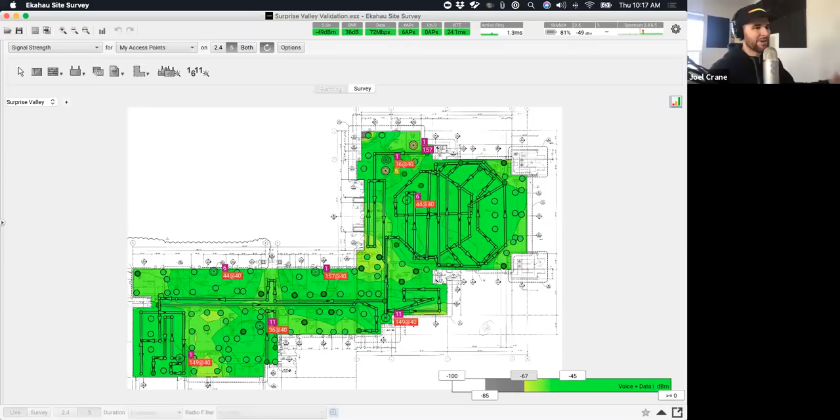So now we are looking at Ekahau Site Survey, and we've got the Ekahau Sidekick connected right now. I'll turn the camera on real quick and show you the Sidekick. I know I'm probably a little bit biased here, but this is one of my all-time favorite wireless tools ever. I love the Sidekick, it's so cool.

Okay, so this is the Ekahau Sidekick. It's basically a wearable, and as you can see, it's a little bit smaller than an enterprise-grade access point, and it's got an included shoulder strap, so you can throw it over your shoulder, kind of like a messenger bag. It's got some pretty great hardware on board, including two enterprise-grade 802.11 AC radios, and the primary function of those is basically for Wi-Fi scanning.

We'll get into the specifics a little bit later on, but they're mostly used for Wi-Fi scanning, which we end up using for site survey data as well. But the other thing it's got is a super duper powerful spectrum analyzer on board - literally the most powerful spectrum analyzer in the Wi-Fi industry. I know vendors tend to make a lot of audacious claims, saying their solution is the fastest and best. I'm not kidding around, it's the undisputed king.

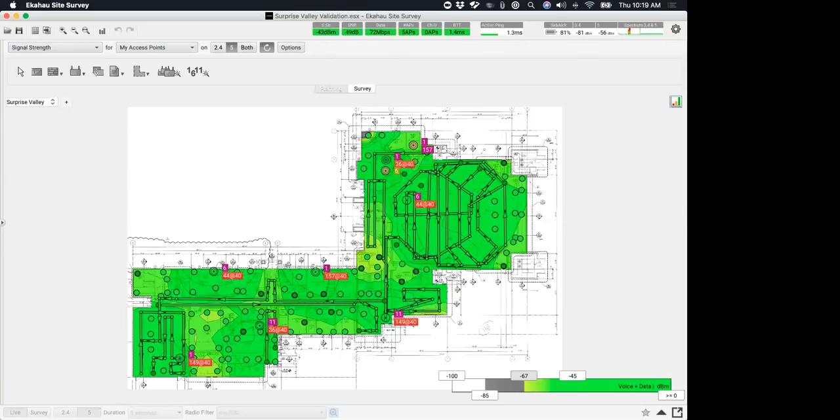That's coming from the spectrum analysis side of me that loves spectrum analysis and really enjoys this stuff. So that's the Sidekick - I've got that one connected right now. Let's go ahead and pop open the Wi-Fi scanning view that is in Ekahau. Down here at the bottom there's this little pop-up button, a little up arrow - that's where we can view the Wi-Fi scanner and the spectrum analyzer included in Ekahau.

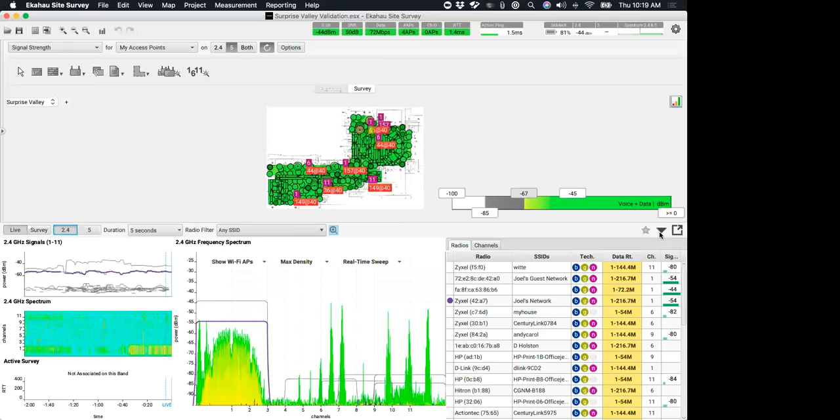So here we go, this is all live data in my environment right now coming from the Sidekick and my little access point and things like that. There's a couple things I want to point out here. I'm going to pop this out into its own view so we can get a closer look at what's going on here.

Terry says his Sidekick is coming today - that is awesome, I'm really stoked for you, Terry. I was really excited when I got my Sidekick as well, and I work for Ekahau. It was like, yes, got my Sidekick. So I understand your excitement.

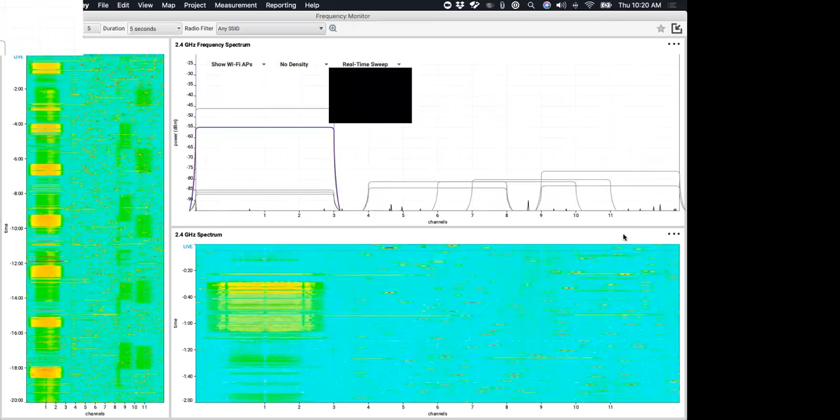I totally get it. So let's take a look at what this looks like live in our environment right now. I'm going to start by hiding the spectrum analysis data just to get it out of the way, and we'll come back to that in a little bit. I just want to concentrate on the Wi-Fi scanning data first. So a couple things we can see here.

First off, Joel's network right here - our signal strength is sitting at about negative 53 dBm. You can see that up there, and we can see that down here in the list as well. Then there's another network here on the same channel. You know what I think that one is? I think that's actually my Chromecast.

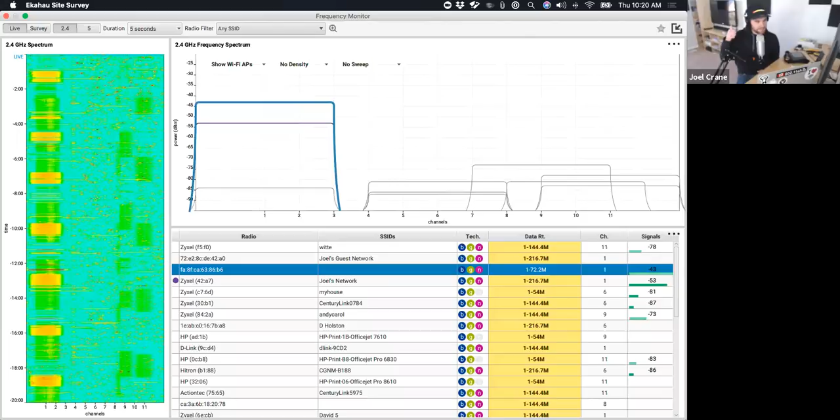If we turn the video back on real quick, you can probably see the TV right there where my thumb is. I've got a Google Chromecast plugged in there, and it's broadcasting its own SSID as part of how the Chromecast system works - it broadcasts its own SSID even while it's associated to my wireless network. So we can see there's the Chromecast, Joel's network, and Joel's guest network right there. Those are the 3 that are on channel 1.

Way down here in low signal strength we've got a few outliers. In fact, that one just disappeared - the signal strength is so low. Oh, and it's back now. That one is on channel 3. If we were to sort to channel 3, yep - CenturyLink 6790, sounds like probably one of my neighbors has just their little customer premise equipment hanging out here on channel 3.

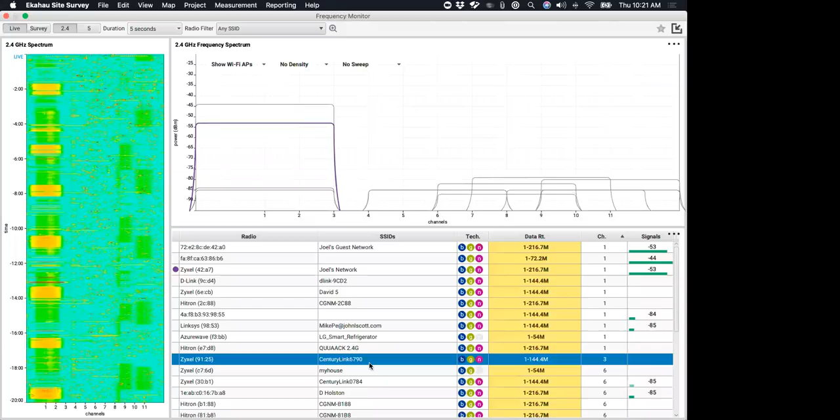So let's go ahead and turn on the spectrum analysis data now, and I'm going to turn on the waterfall view here so we can get that view as well. Let's talk about what we are seeing here in the spectrum - what's all this stuff going on right now? Things are going to come and go, and I'm going to use what I have here as an example.

The first thing I see is all these little spikes everywhere. Notice all these tall green spikes that keep randomly popping up all over the place. Down in the waterfall view, those spikes are also these little red dots that show what is happening over time. All of those little spikes, each one of those is a Bluetooth hop from my Bluetooth mouse and keyboard.

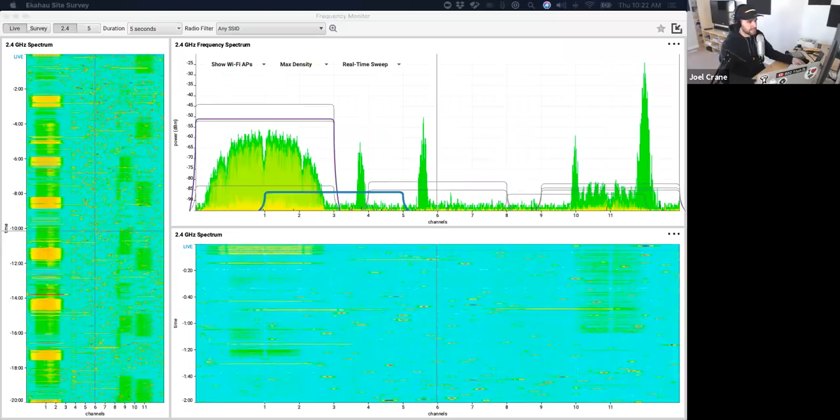If you look on my desk here, I've got an Apple Magic Mouse and a wireless keyboard - these are Bluetooth devices. I've also got an old Pebble smartwatch on, you can't see it because of my hoodie, which is the official Ekahau hoodie by the way. Those little spikes in the spectrum are all hops from my Bluetooth mouse and keyboard. The other thing we're seeing right here on channel 1 is this curve shape in the spectrum - notice it's perfectly lined up with the center of my wireless network channel. That curve shape is an 802.11b transmission.

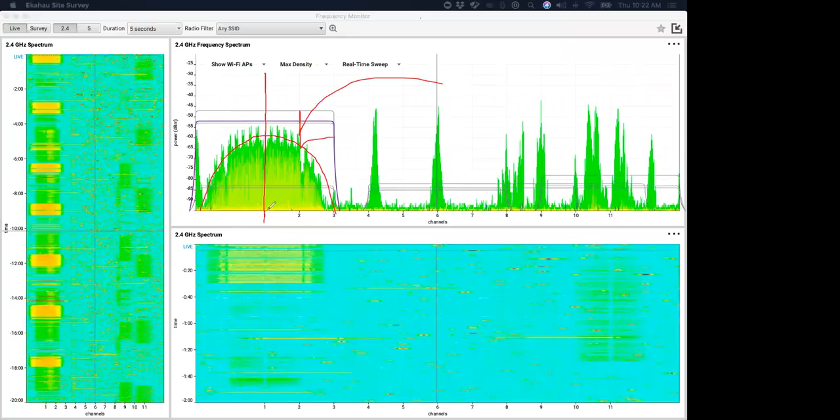And so there's something talking on that channel using an 802.11b data rate. And so that's just one of the things that we can see there. If we switch our view over to the channels view, we can see that our spectrum utilization right now is basically 0. Let's look at a longer time span, maybe 60 seconds worth of data. Looks like over the past 60 seconds, the average utilization on channel 1 is about 3%.

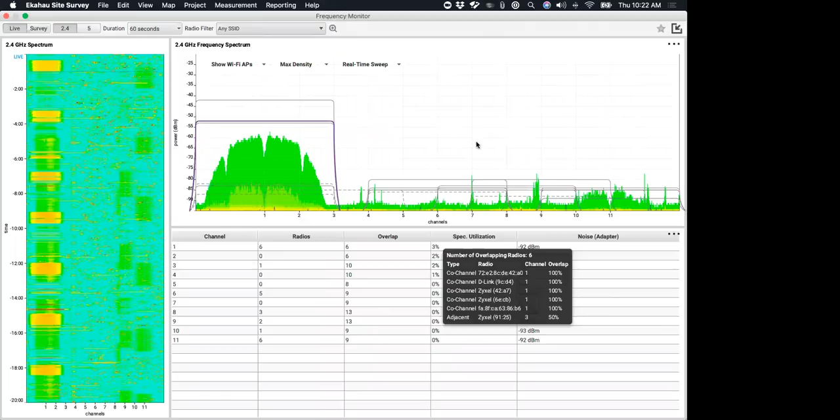Now let's skip up to the 5 gigahertz band and see what we can see up there. So I'll switch up to the 5 gigahertz band mode real quick here. It'll just take a second for Ekahau to make the switch. There's quite a bit of data coming in here. Okay, so here we go. We've got,

let's bring back our waterfall real quick here. And let's take a look at what's going on in our environment right now. What is actually happening here in the 5 gigahertz band? Well, if we zoom in on this channel, we can see that I'm actually running an 80 megahertz wide channel here, and we can see all of the activity on those channels right now.

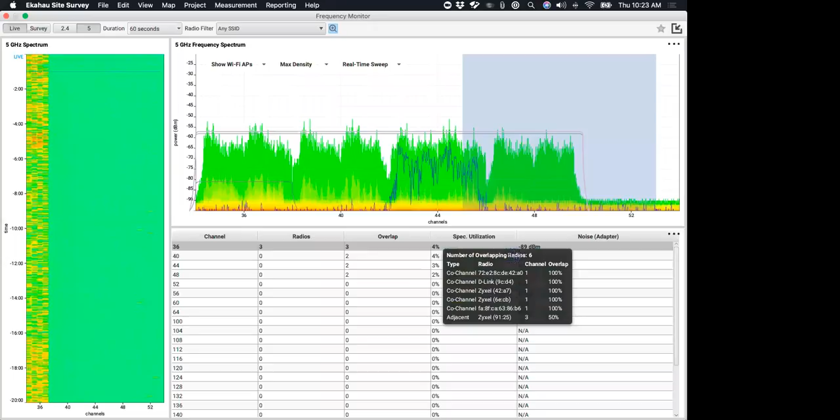So if we go back to the channels view, we can look and see, oh no, demo fail. Getting beach balls again. It's probably because I'm running a virtual machine and a bunch of stuff in the background right now, but we're looking at about 3 to 4% utilization right now. So that's just kind of a cool look at how busy is that channel, what's going on those channels right now. And that's all Wi-Fi right there.

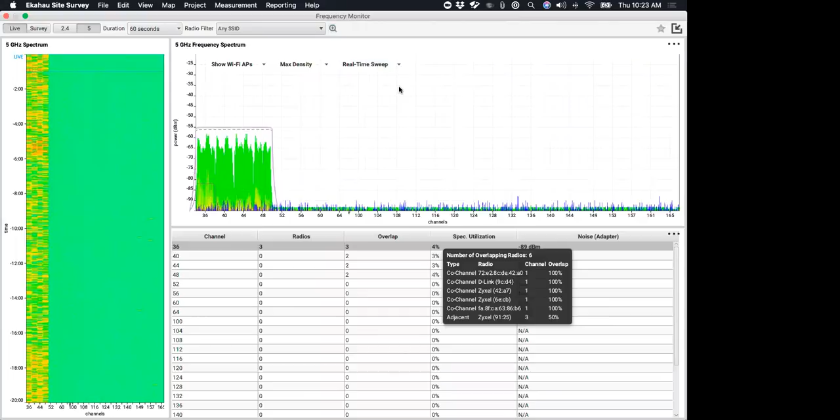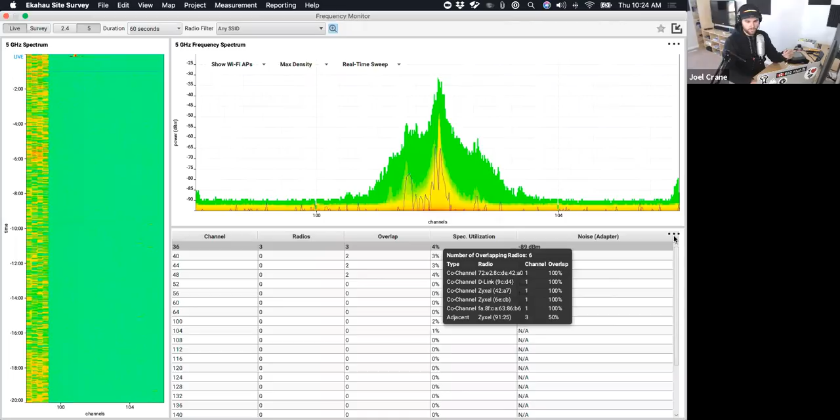But what about stuff that's non-Wi-Fi? What can we do for non-Wi-Fi stuff here? Well, I have a little toy here. This is something that my pal Jerry Olla here at Ekahau got for me. This is a little wireless video camera, and I want you to watch what happens when I plug this bad boy in. This thing is a lot of fun. So if we plug it in, we can see this shape pops up right here between channels 100 and 104. That is this little wireless video camera.

And if we turn our time span back down to about 5 seconds, we can see that the color indicates how often something is talking. If you see green, that means it's a really short signal. If you see red or black, that means it's a constant signal, kind of like an air horn. And so luckily there's nothing on channels 100 or 104 up here.

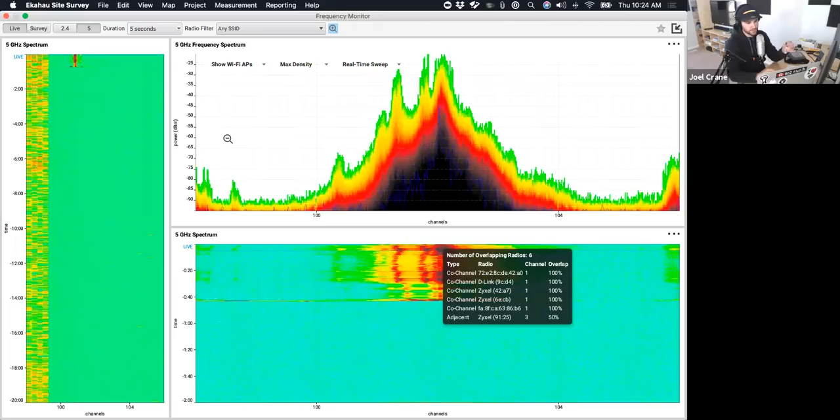I made sure that I didn't want to be on the same channel as this while I'm presenting to you over Wi-Fi. That'd be a terrible idea. Yeah, I've totally jammed myself while giving a webinar before. Bad idea. But anything on channels 100 and 104 is going to have a bad time right now because of this device that is transmitting on those channels. So that's what I wanted to show you on the spectrum analysis front.

So with that, let's switch gears here and move on to talking about the next tool that I have in my toolkit. So starting with a Wi-Fi scanner and a spectrum analyzer, coming from the Sidekick. Lots of options out there, but the Sidekick is by far my favorite one. I love this device. The spectrum analyzer on it is just awesome. The next thing I want to talk about, though, is packet capture. You could say either packet capture or packet analysis, packet capture being the process of actually collecting the data.

So how do you get a packet capture? Well, you're going to capture all Wi-Fi traffic from a specific channel. So what we could do is take a standard Wi-Fi adapter. I don't think I have anything in reach here, but we could take a standard Wi-Fi adapter, tune it to a specific channel, and just grab all the packets that we hear on that channel. An excellent packet capture device is actually a MacBook. It's one of the reasons why I use Mac OS.

Don't worry, I have an Android phone. I'm not a total Apple fanboy. I do think that there's some great products on both sides. I love all that stuff.

But MacBook makes an excellent packet capture tool. And to do that, if you look on my screen here, I have to turn off annotations first. Okay, there we go. There's an excellent tool out there called AirTool. This is by our good friend, Adrian Granados. And if you just Google AirTool, you can go find this tool.

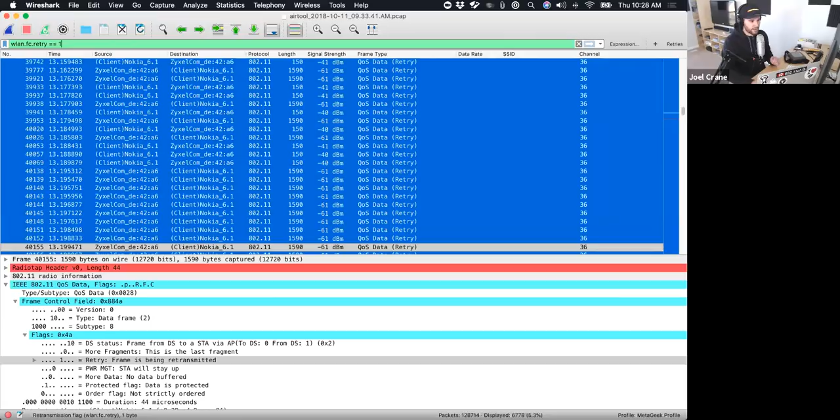Another tool out there that I really love is a tool by our good friends over at MetaGeek, which is Eye P.A. Eye P.A. is kind of fun because it breaks packet analysis down from an airtime usage standpoint. How often did things consume the air? So go check that out. Great tool. Love it. But that's another webinar for probably another day. Okay, cool. So let's move on from packet analysis.

And let's go take a look at the next thing that I wanted to show you today, which is virtual network design with Ekahau. Now, this is something I get really excited about. I love Ekahau, and I love the virtual design tools in it. But first off, what is a virtual network design? What is it? Well, oh man, PowerPoint is letting me down real bad today. Actually, it's my fault. I shouldn't blame PowerPoint. I didn't set up the slideshow correctly.

Virtual network design is also known as predictive modeling. That's when we're going to create a model of a wireless network, and so we're going to basically simulate the wireless network. Now, this is really great because you can perform a wireless network design without spending a ton of time on site. You don't have to spend days on site moving around access points, figuring out where APs should go, what their transmit power should be, what the channel plan can be. You can go inspect the building, see what's going on, and then take all that data back and input that into a predictive model, a virtual network design.

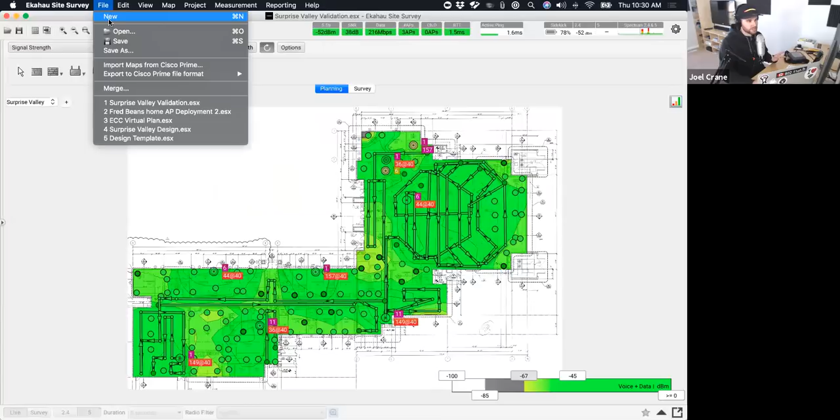So, okay, here we are in Ekahau, and I'm just going to start a brand new project file here. This is an existing one that I was working on earlier, but let's go ahead and just start a brand new file, and we need to bring in a map first thing.

So I'm gonna add a map here. And just kind of for the sake of time, I'm going to bring in a CAD file, a DWG CAD file. Now, you can bring in like a flat image file, like a JPEG or a PNG or a PDF or something like that, but the CAD file is going to speed things up a lot. And plus, I just want to show it off because it's really cool. So Ekahau is going to load up that CAD file.

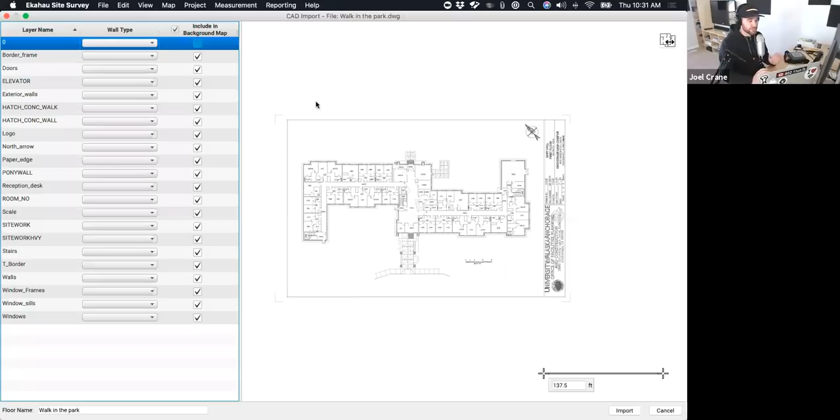Question from Matt that's very applicable for what we're talking about right now is, can you use Visio drawings or only AutoCAD? Specifically, Matt, the type that we support is going to be a DWG CAD file. And we chose that because it's a pretty broad type of format that you should be able to get out of most tools out there. Most things like Revit should be able to export a DWG CAD file. I'm not an expert in the CAD side of things, but my understanding is it's kind of an open format that you can get from a lot of different applications.

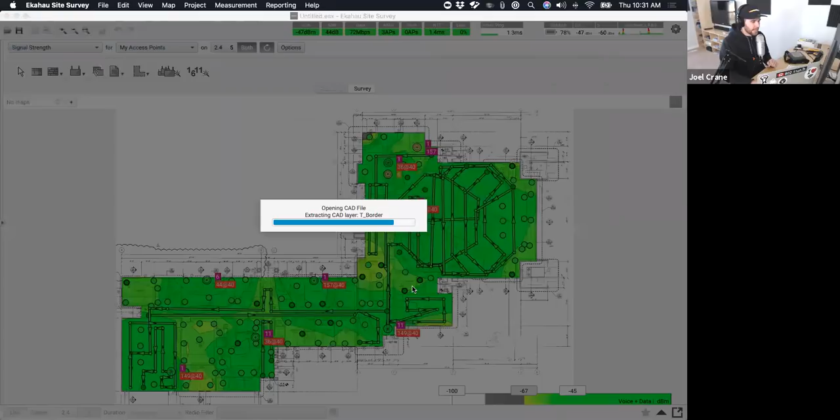So I'm going to switch from this kind of print layout view in the CAD file to just the model. I just want to get rid of all the extra print stuff that I don't care about. So we'll load that up real quick. And then I'm just going to go through and tell Ekahau what all the layers in the building represent. And so the doors, we'll say that those are 6 dB solid wood doors. For the elevator shaft, we'll say that that's a 30 dB elevator shaft.

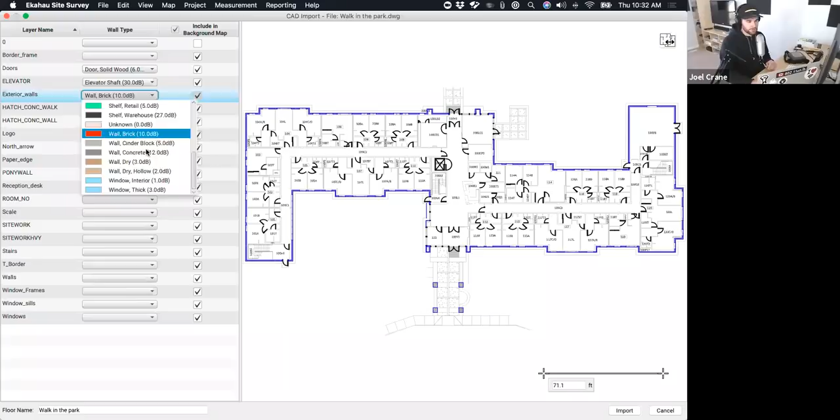For the exterior walls, we'll say that this is a brick wall. So we'll do a 10 dB brick wall around the outside. For the stairs, we'll line the stairwells with a 5 dB cinder block wall. And then for the interior walls, we'll do a 3 dB wall. So there we go. We've now told Ekahau what the building is made out of. So we'll import this design really quick.

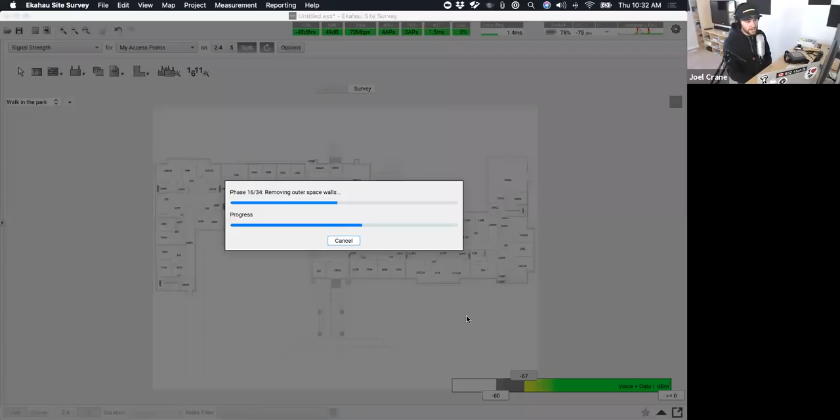And now Ekahau is going to go through and give us a bunch of really useful messages about exactly what it's doing right now. So let's see what it does here. This can't be right. Trying again. Removing outer space walls. You got to get rid of those. The only one of these messages in here that's true, by the way, is wasted 80% of our developer resources to write these. And I guess saving 16 hours of mouse clicking if you have to manually draw in walls, which isn't that big of a deal, by the way.

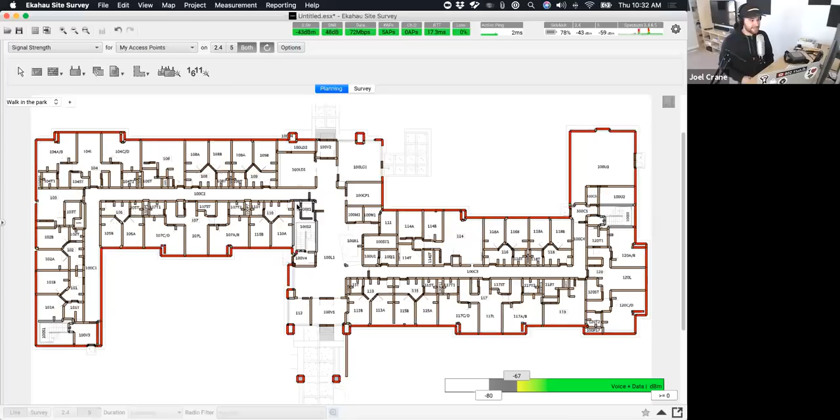Okay, so here we go. We've got our walls all drawn in here. Now, one thing I do recommend doing is if you can go on site and take a portable access point with you, it doesn't even need to be the AP that you are going to deploy, and measure some of these walls. See how much loss there is from one side of the wall to the other. That's a great use for a Wi-Fi scanner. Check and see how much signal strength do we see knocked down as we move from one side of the wall to the next.

Okay, so let's go ahead and define our area where our network is going to be really quick. I'm not going to take a ton of time to go get all the little corners and things like that. This is just an example for a webinar, so we're just going to be quick here. Come on, Joel. So now let's go ahead and get our area drawn in there. So there we go. And now we can choose an access point and start placing APs on this map.

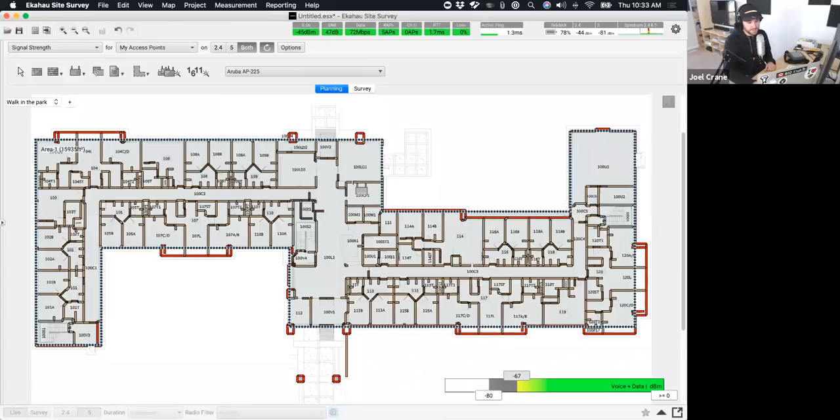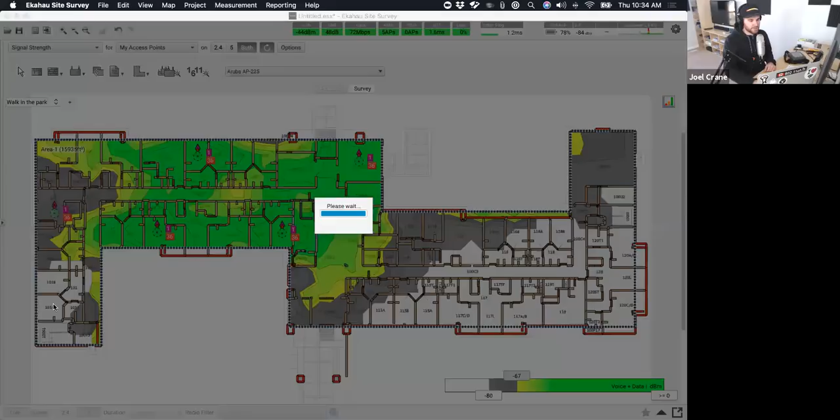So I'm just going to pick a random one. I'm going to go for an Aruba 225 today. Yesterday it would have been Cisco. Day before that it would have been Ubiquiti. So we'll go ahead and place an AP here. And I'm just going to go through and basically place access points until we have some decent coverage in this environment. Now, remember, this is a predictive model, and so this is being simulated in Ekahau right now as I place these access points. Now, this is one way that you can plan for coverage.

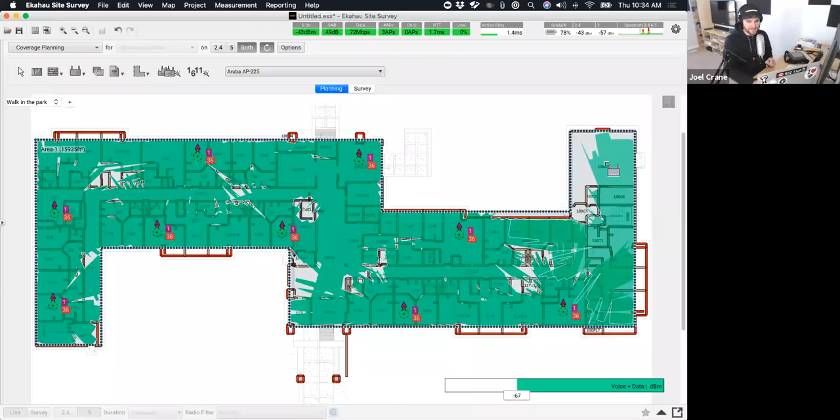The other way, there's a super cool new way that our development team just got in here, which is the coverage planning tool. I love this because basically you can just hover your mouse around and it'll give you real-time feedback of what coverage looks like in the environment. And to make sure that things are nice and quick, I'm actually going to turn off video for a little bit. Don't worry, we'll bring it back here in a little while.

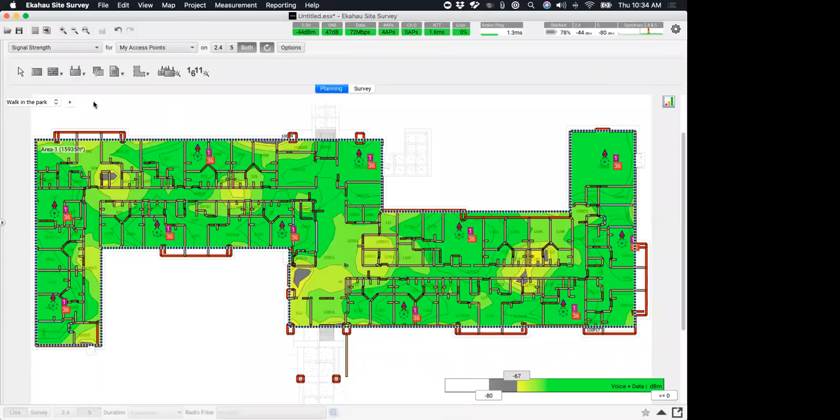Okay, so there we go. We've got all of our coverage in here. Let's go check on our signal strength visualization again. Signal strength isn't everything, but it's important for sure. So there we go. Looks like we've got some signal strength. But the real thing that I'm curious about is, are we passing requirements or not? Are we meeting the requirements for a good Wi-Fi design? So if we go look at network issues, let's see how we do.

Ooh, okay. Well, it turns out that anywhere that there's color here shows us that there are some issues with this wireless network. The worst one that I'm seeing here is channel overlap. Notice it's the pink or magenta color here. We've got some pretty severe channel overlap here. So let's see if we can fix that.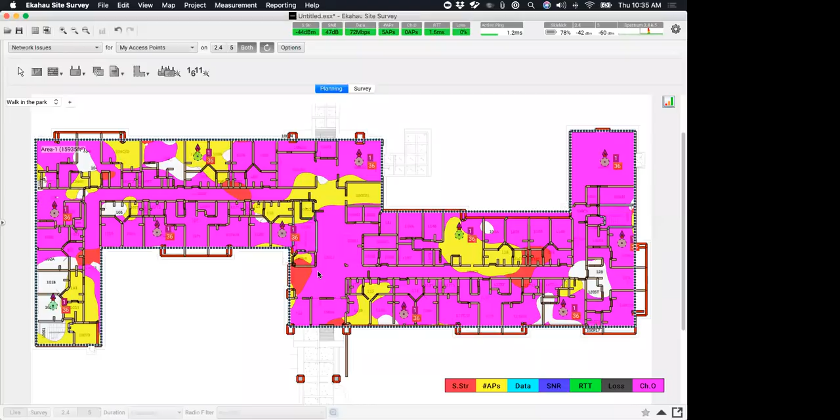So if we go look at the channel overlap visualization, we can see that anywhere that's gray is where we have 2 or more access points sharing the same channel. And if you remember, only one device can talk on a channel at a time. So having a bunch of APs on the exact same channel doesn't help at all. It's not good Wi-Fi. So we need to fix that.

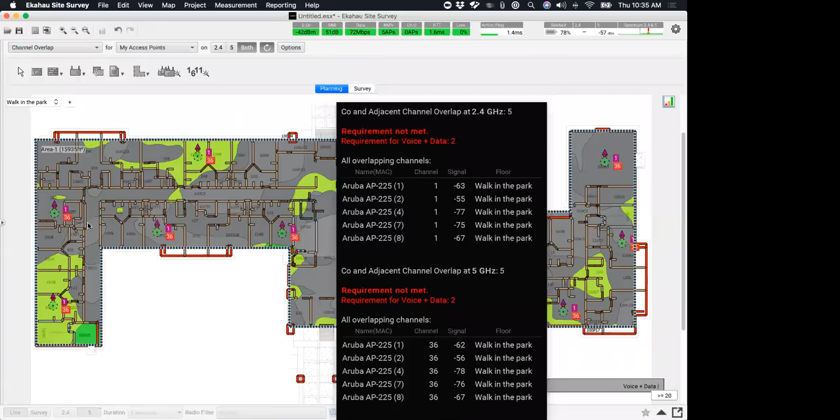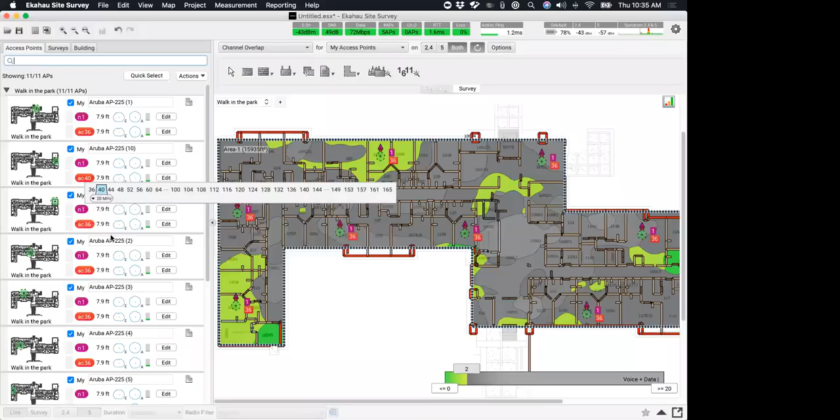Now, what we could do is we could go through and do a manual channel plan on this. We could go, okay, well, this one's on 36, so we'll put this one on 40, and then we'll put this one on 44, and we could manually plan out the channels of this wireless network. But why would we do that? We got computers to do this stuff for us. So what I'm going to do is run the channel planner here.

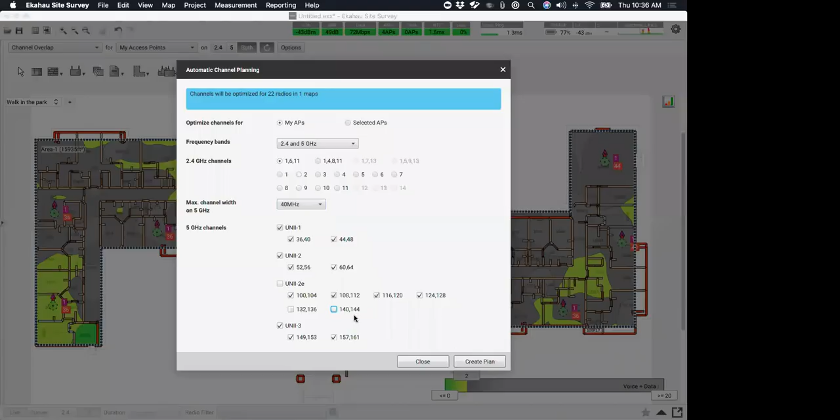And we could tell it whether we want to use 20 or 40 megahertz channels. I think I'm going to use 40 megahertz channels here, but I'm going to disallow channels 132, 136, 140 and 144. Maybe there's some neighbors that are on that channel already. Maybe we have a client device that does not support those channels. So we'll hit create plan, and Ekahau will go through and rearrange all those channels for us. So now let's see how things look in the 5 gigahertz band.

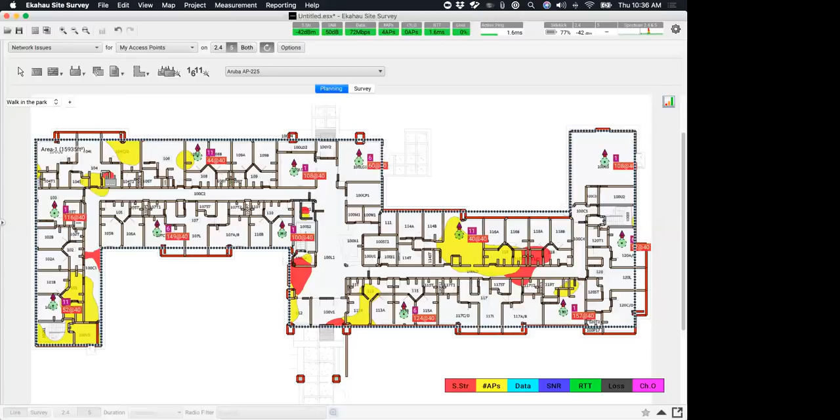Oh yeah, beautiful. And let's go take a look at our network issues and see, okay, things look okay, but there's still some coverage areas here. Anywhere that's yellow is where we only have one access point covering those areas. There's no second access point for things to fall back on. So I'm just going to go ahead and up my AP density a little bit here by adding a few more APs, and we'll take care of that little dead spot right there.

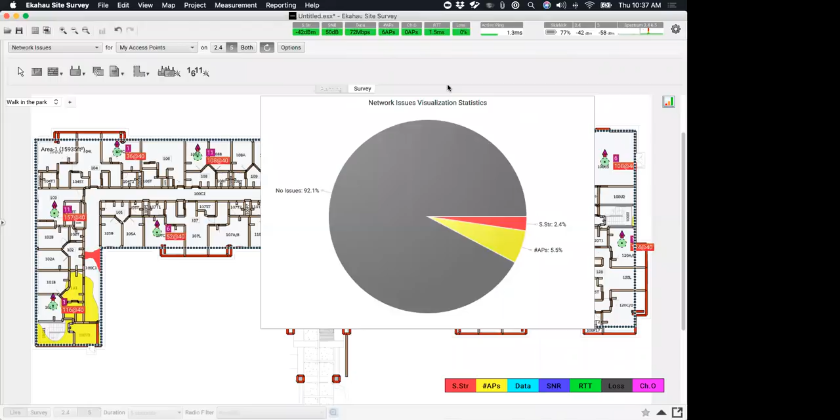And we have reintroduced some channel overlap. So I'm going to run the channel planner one more time here. And you know what? I think that looks pretty good. That looks like the basis of a decent network design. So let's see how we're doing from a requirements standpoint. How often are we meeting requirements? Well, looks like we're meeting requirements on 92% of our floor plan. And so that could be a good design for our network.

So I hope that gives you a good idea of what a virtual design tool does and how that can help you plan a wireless network without having to spend a ton of time on site. I do recommend some on-site time to figure out what the building looks like, see what the materials of the building are, measure a few walls, know how tall the ceilings are and things like that. It's a good idea to go on site for those kinds of things. But you can really knock out a design really quickly with a virtual design tool.

So we're going to actually look and see what the real world coverage looks like. Now, remember, a moment ago, we just did a predictive model, right? That is a prediction of the wireless network.

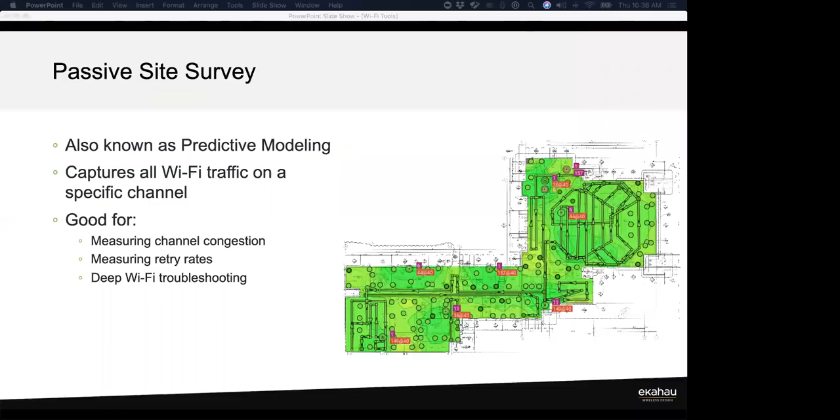So what we're gonna do is we're gonna go on site and we're going to take real world measurements of the wireless network to see what the coverage actually looks like. How does the network look in the real world? We did our predictive design, we got it close, but we need to go validate the network and make sure that it's actually achieving the requirements that we have set for it.

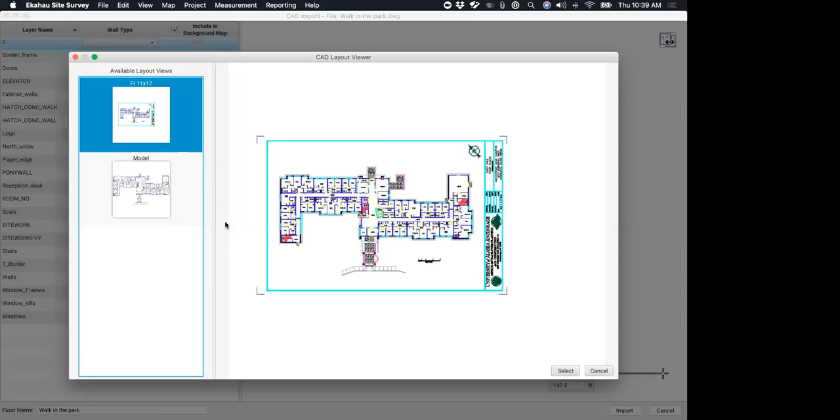So here's how we do a site survey. So I'm just going to start with a fresh project file here, and I'm going to bring in a map. So we're going to use the same map that we used earlier, but this time, since we're just gathering data, we're not going to bother with any walls or anything like that. I'm just going to go ahead and select the correct background map that I need, which is this map right here. And then we're just going to hit the import button.

We're not going to worry about drawing in walls or anything like that, because this time we're just going to go collect data. There's not going to be any predictions done here. It's just going to be strictly data collection. Okay, so we have our map here. It's all ready to go. We're going to switch over to the survey tab. And let's start out by conducting a continuous survey.

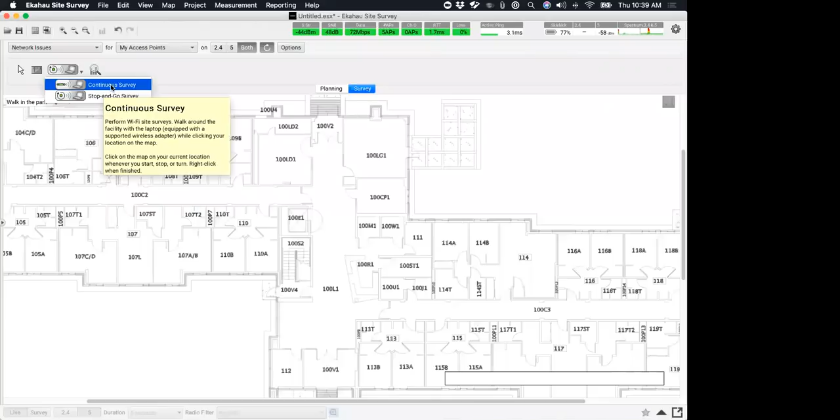So we've got our Sidekick on. It's slung over our shoulder and it's plugged into our laptop. We've got our laptop in hand. We're going to walk all over this building and take measurements all over the place, and that's what's going to be used to draw our real world data to validate the network, to make sure the network meets the requirements that we have set for it.

So I'm going to start in the lobby here. I'm going to stand here in the lobby, and I'm going to click, and I'm going to start walking, and I'm going to walk in a straight line at a consistent pace. While I walk, the Sidekick is going to be gathering data points in the background. As soon as I come to a corner or some place where I need to turn or change directions, right as I get there, I'm going to click on that spot and then sharply change directions.

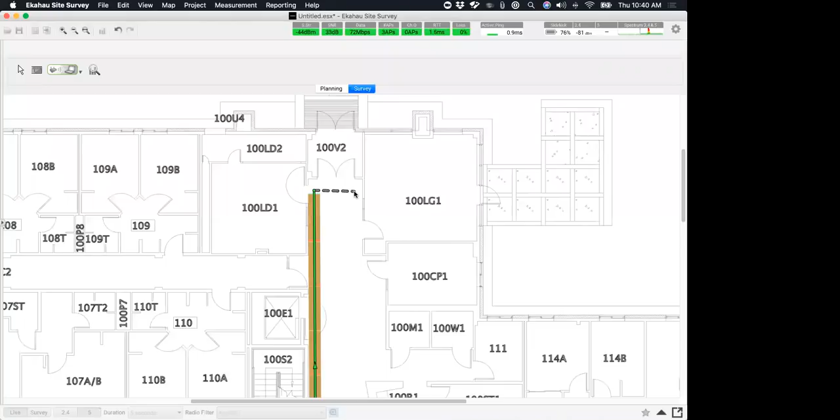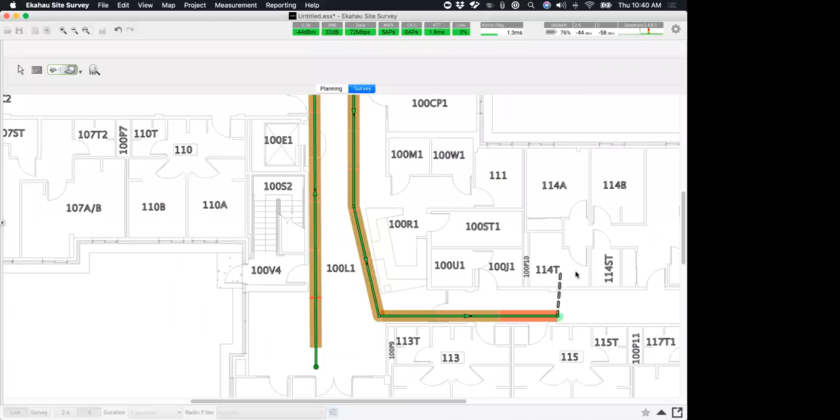We'll walk across the hallway here, and then we'll click there, and then we'll head back down here towards this reception desk. So all you have to do is click whenever you change directions and just walk at a consistent pace, so all those data points can be nice and evenly spread out. So typically what I do is I'll walk down one side of the hallway, back up the other side of the hallway, and I'll just kind of crisscross and zigzag all over the place until I've gotten data points for the entire map. And I'll show you a completed survey here in just a moment.

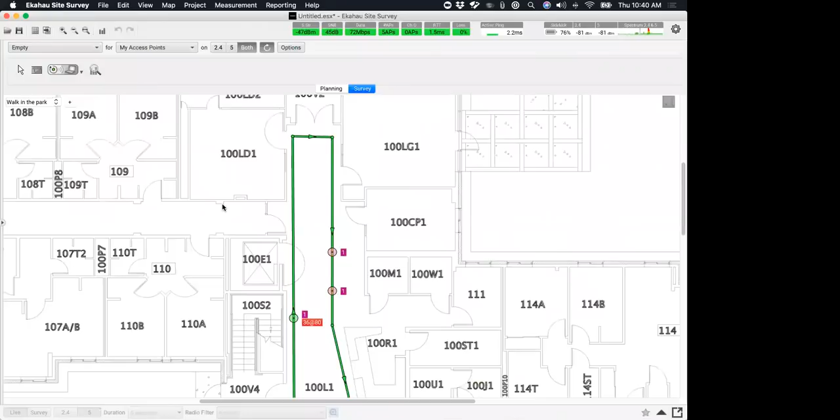The other type of survey is going to be a stop and go survey. So a stop and go survey is useful for smaller, more enclosed spaces. Think classrooms, think hospital rooms, things like that. Places that are kind of hard to get in and out of and hard to navigate in a continuous fashion. I really like the stop and go survey for small enclosed spaces.

With a stop and go, you're just going to go stand somewhere, just stand there, and click on the map where you're standing, and the Sidekick will take a data point while you stand there. And then as soon as that's done, you'll move on to the next place, click again, it'll take another data point while you stand there, and rinse and repeat until you have all of the data points that you need to draw a map of your real world wireless coverage and see whether your network is meeting requirements or not.

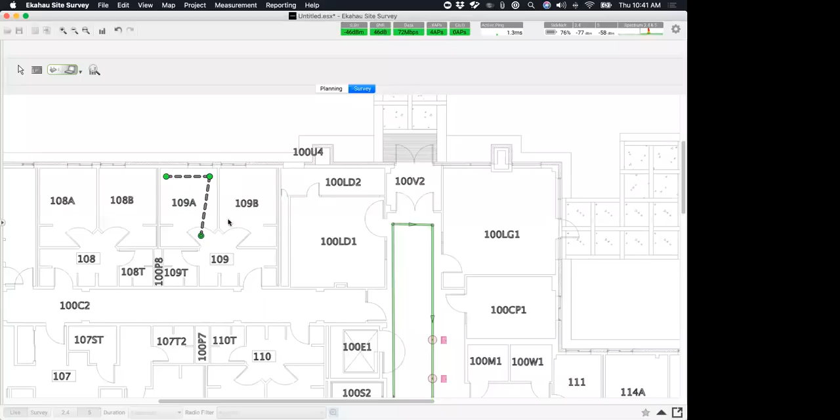So this is obviously bad data because, if you were looking at the video earlier, you can see that I'm just sitting at my desk right now. So none of this is good data. So let's just go take a quick look at a completed site survey.

This one's a couple years old now, but it'll work just fine.

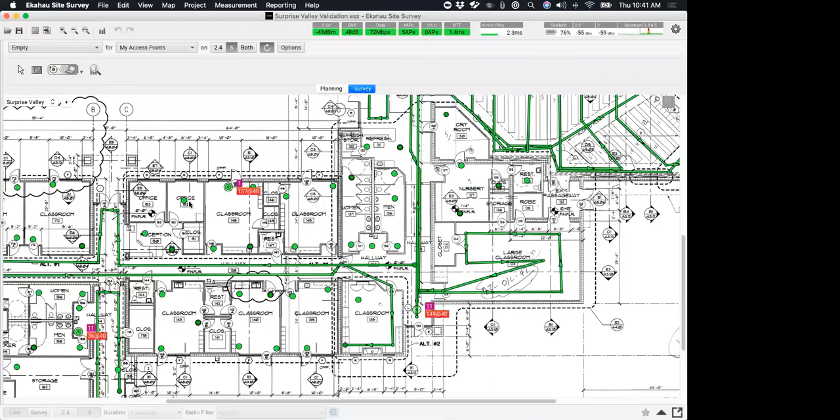This is a look at a completed survey here in this building. You can see where I did continuous surveys and walked around all over the place, up and down each side of every hallway, and where I did stop-and-go data points in all the classrooms and places like the gymnasium, which was full of stuff at the time, kitchen, places like that. I really like the ability to mix continuous mode surveys and stop-and-go surveys.

This is exactly the same view as we saw when we did the virtual design. We can see that we're passing requirements for the most part, although we've got some areas where we're failing our number of access points requirement. We've only got one AP covering these areas, so we're failing that requirement in those areas. Maybe we need to do some work there to see if we can remediate that problem and get things fixed up a little bit.

Okay, so there we go. That's what I wanted to show you on the passive site survey side. The other thing I want to talk about is an active site survey.

Now be careful here. There are two main types of survey in Ekahau. There's both the passive survey, which we talked about just a moment ago. That's the most important type of survey. That's data that's drawn from beacons from access points. And while it doesn't sound very exciting, it is by far the most important type of survey. The active site survey is more of a nice to have, kind of a bonus that you can get.

And there's two types of active survey that you can do. You can either do a throughput test or you can do a ping test. A ping test is where we just take a normal, standard, off-the-shelf Wi-Fi adapter—maybe it's the adapter built into your laptop that you're surveying with, maybe it's an external USB adapter. That's going to just ping a host out on the network somewhere, and that's going to get us round trip time, jitter, and packet loss, so we can see how smooth things are on the wireless network.

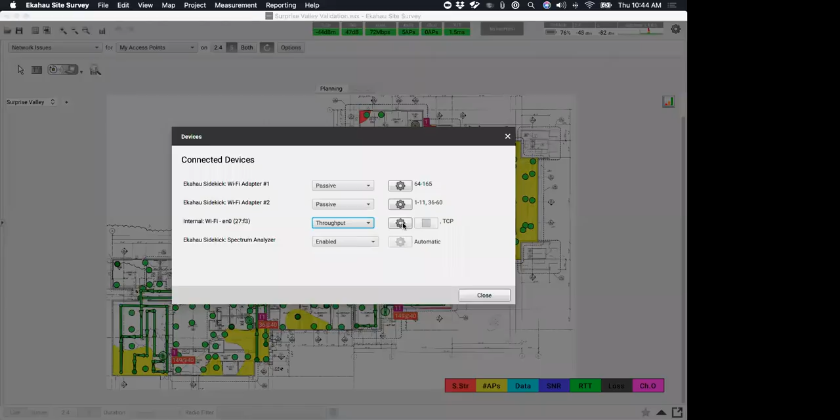If you just go to the throughput test here—this is my internal adapter on my Mac—we can basically go point it at an iPerf server, maybe on my local network here, maybe 192.168.0.51. If that's where my iPerf server is, then it will begin performing that iPerf throughput test.

Remember that iPerf is open source and readily available on the internet. But we do have our own implementation out there called ePerf. The reason why we came up with our own implementation is because iPerf is not very good at handling breaking and reconnecting sessions. When you roam from one access point to the next, that tends to break iPerf. So we came up with our own completely compatible implementation called ePerf, and you can just Google that and go grab a free copy from our website.

He basically came up with a custom image that you write to an SD card and plug into the NanoPi, and then the NanoPi starts up an iPerf server and displays the IP address of the server right on the screen. So you can drop that next to your switch, plug it in, and point Ekahau at it once it displays the IP address. You can find out more about that little box at WLANPi.com.

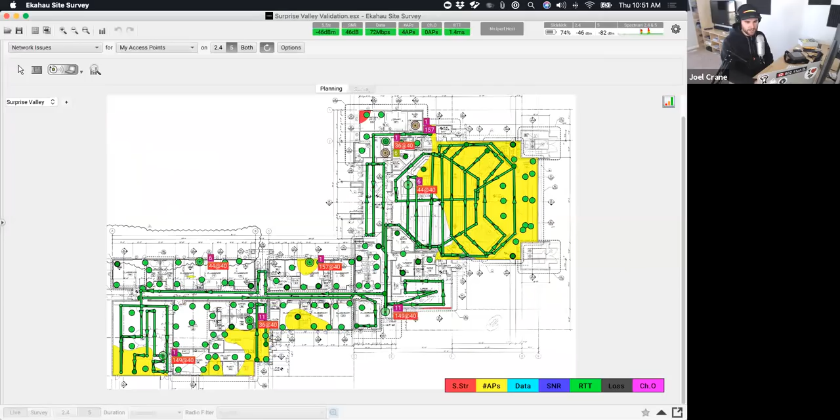A question from Jan: can you show how to read utilization in the spectrum analysis view? That's a great question, let's take a quick look. If we pop open our copy of Ekahau here... oh, I still left my camera running, I guess it doesn't matter, it's not hurting anything. If we look at my 80 megahertz channel here and see what's going on, I'll turn off the video so we get good screen share performance. We can see that channel 36 is being used about 2% of the time right now.

Remember, this is over a set time span. We're looking at a time span here, and over the last 5 seconds we're seeing somewhere between 3 and 4% utilization. Maybe we should bump it up to 120 seconds, or 2 minutes, and Ekahau will calculate what the utilization has looked like over that period. It looks like about 4 to 5% on all 4 of those 20 megahertz channels. I saw another question about how that's calculated — it's basically an average across the channel. The spectrum utilization value is a good measurement of how often it's busy, from an 802.11 or Wi-Fi standpoint, how busy on average that channel is on the network. Hopefully that answers the question.

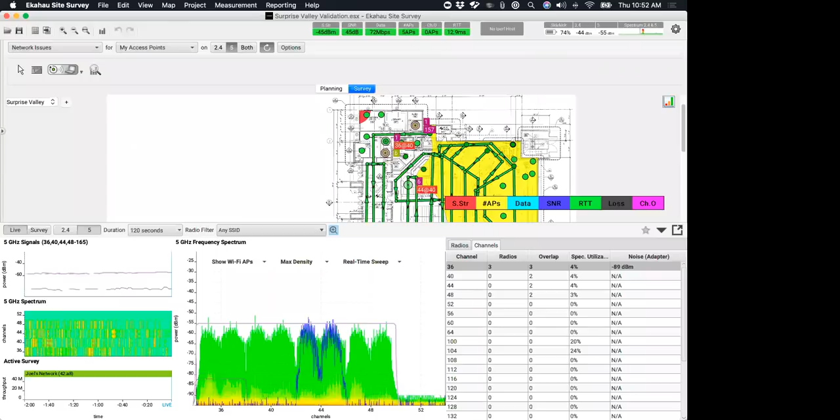Next question: is Ekahau Site Survey compatible with Linux, or does it work with Wine? As a longtime Linux fan, I've always been a perpetual Linux newbie — I'm the kind of guy that uses Ubuntu and things like that. Unfortunately, no Linux compatibility at this time, and I have no idea whether it'll work in Wine or not. Good question for sure. My preferred platform right now is Mac OS because I like having pinch to zoom and things like that.

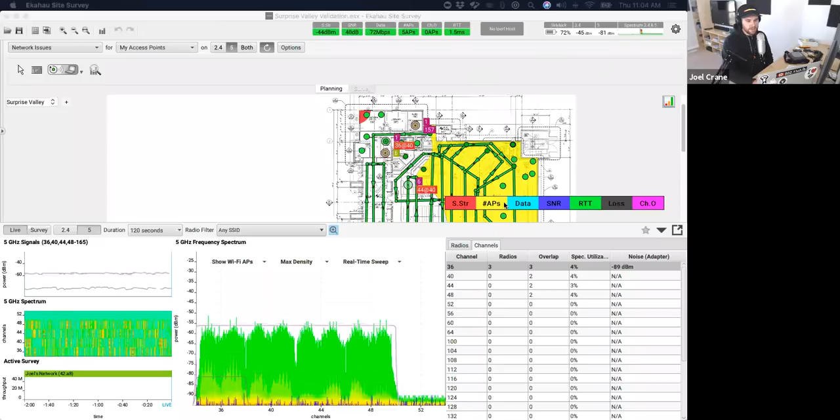Let's see. Ted has a question. Could you show how to locate an AP with a spectrum analyzer? Yeah, Ted, I can. Although the honest answer is that a spectrum analyzer is actually not going to be the tool for the job here. We're actually going to use either a site survey or a Wi-Fi scanner to do that. I think we'll probably make this the last question before we wrap things up. So if we're going to do that with a site survey, when I conducted this survey, notice that it actually placed access points for me.

So it detected an access point right here. Right now, the way that Ekahau does AP placement on the map is where signal strength peaks. It looks at where the signal strength is the highest for that AP, and that's where it puts the AP. So when you do your surveys, make sure that you cover things pretty thoroughly, survey everything, and if you can see the access points, walk directly underneath them, and Ekahau should place them accurately. So that's how you can locate it with a site survey. You can also locate it with Wi-Fi scanning as well.

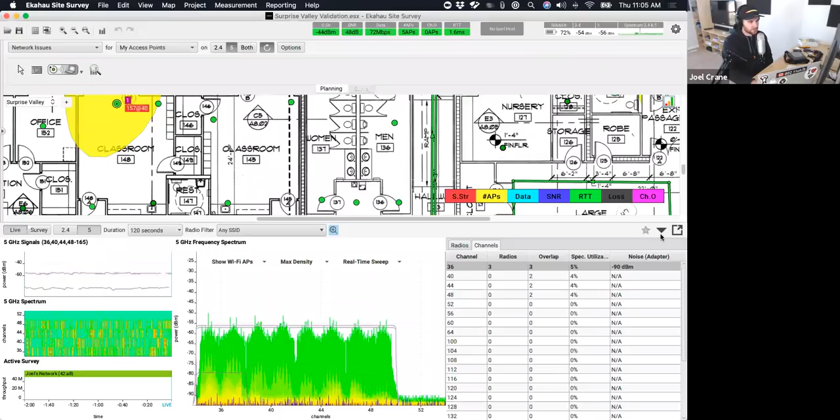Let me show you the Wi-Fi scanner really quick. There is a signal strength over time graph, and you can see that line. Okay, here it is right here. There's not much going on because I'm not moving around, but you would see this line climb up and then go back down, and that's where your AP would be if you're walking around. But really my favorite way to locate APs is to do a site survey, and then Ekahau will place those on the map. Usually it's pretty accurate, usually within about 10 feet or so. Just remember to do a nice thorough survey. The more thorough your survey, the better it will be.